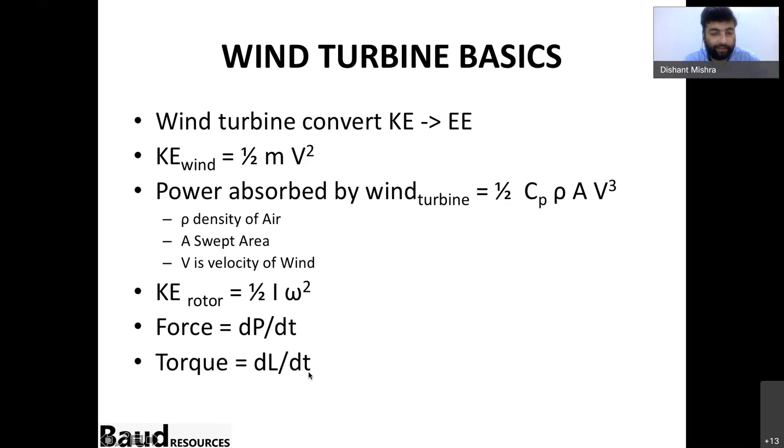For understanding the technology, we also need to know that kinetic energy of a rotating device is equal to half I omega square. Force can be written as the rate of change of momentum, dp by dt, and torque is dl by dt, where L is angular momentum.

In a regular wind turbine, there is aerodynamic loading onto the turbine as I represented in the previous slide, and all the energy given to the turbine is converted to half I omega square into omega - that's power. The electrical system takes away the power by having a rate of change of flux, d phi by dt. The purpose here isn't to take you through the mathematics, but to understand the transaction between all the components.

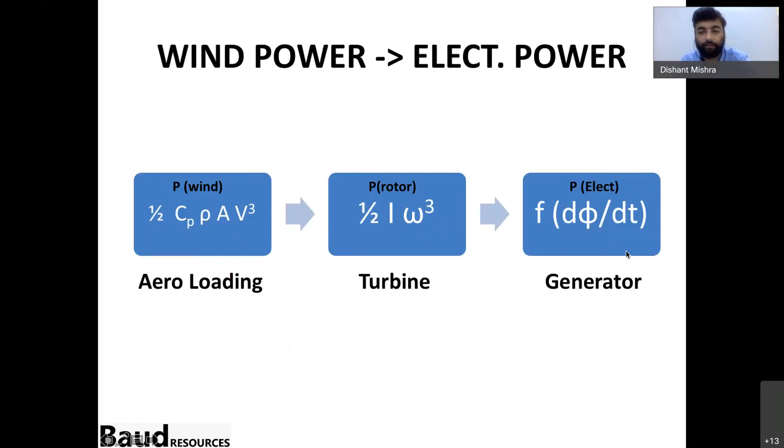Wind comes in and is absorbed into the turbine in mechanical form. From mechanical form, it reaches the electrical system. So these are the three transactions: air to mechanical, mechanical to electrical.

If you go through a typical graph between power and wind velocity, you'll find the turbine starts to generate at a cut-in velocity, where the input energy is sufficient to energize the generator. Once online, it reaches a height when the graph peaks, known as the rated power. It's a function of velocity, and once it reaches the rated velocity of the turbine, the additional power given to the system is actually being rejected.

So we've divided the entire graph into two parts: the sub-rated, where you haven't reached the rated point, and rated, which is the specific line where power is at its peak. Beyond that, whatever input the velocity is giving is actually being rejected. That is the super-rated zone.

I want to take a step back and tell you that wind turbine is the only power generation based out of turbine where the fuel supply is not in control. If ideally we had wind in our control, we would have created it in such a way that it exactly matched the demand we have. But wind is not in our control, and that's why we have to keep the controls in such a way that we generate the maximum, but beyond a point it's not possible for us to generate that.

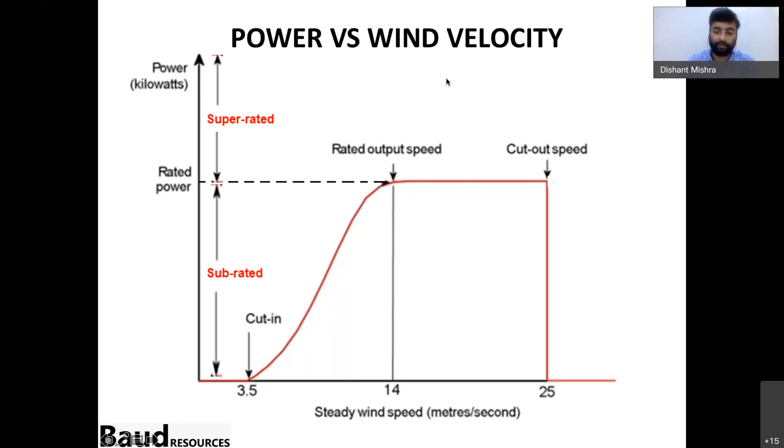If you extrapolate the graph, you'll find a huge amount of wind—if you add 14 to 15 over here, the graph reaches a very high place on the power side. That's any velocity you add beyond rated. So whatever we are rejecting is a huge volume, and that's where we see a lot of wind across the year.

If we do the numbers, a 1 megawatt turbine will have around 30,000 megawatt hours crossing it, but at the end of the year it generates only 2,500—roughly 10% of its total capacity. So current wind turbines generate only around 10%. The number may vary, but it won't go much beyond 20% from what I see. So only around 10% of the wind energy that goes through the turbine becomes electricity.

The reason is, whenever there is high wind, we just have to reject it simply because our turbine system cannot capture it. And this is what started as the opening thought for us to do the research.

I've been in wind turbine technology for around 8 years, and the initial 4 years were my research and development time, during my period in university in Germany.

I was able to go through and understand what can be done about this, and we identified that any flywheel or power generating rotating device has a kinetic energy which is half I omega squared. The only two ways to increase its kinetic energy are to increase omega or to increase I. In current wind turbines, omega is actually locked beyond a point—you cannot go, let's say, beyond 300 rpm.

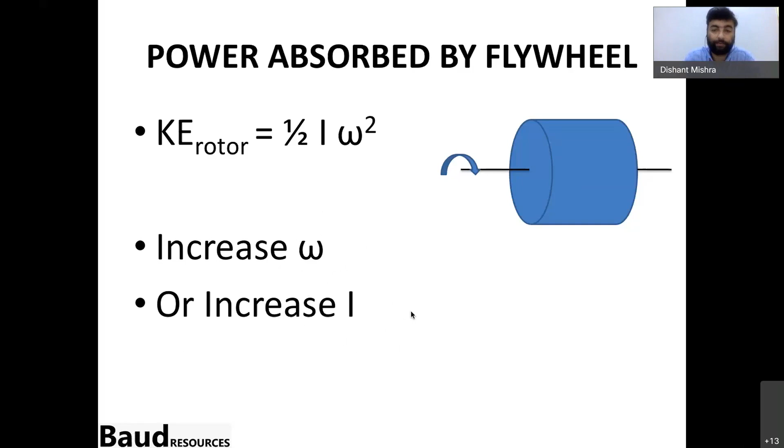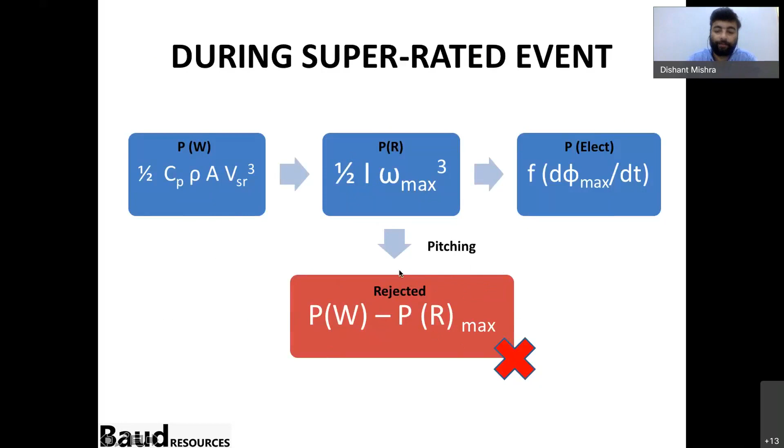That's where only half part of the mathematics has been restricted. The other half is actually I, and that's where we can still go out and increase that. That's where the problem lies—converting aero load to mechanical load—and this is where current wind turbines cannot handle it, simply because they have a limitation on omega. Because of that, all turbines are designed to reject the additional omega. But in our tech, what we're proposing is: do not increase omega, just increase the I, and that's where we come in. I don't want to go through the details, but this is what we do.

This is how the turbine has been designed. In the sub-rated zone, there are weights placed inside the turbine, and when it's in the sub-rated zone, we are not shifting any weight anywhere. The omega is running the show, and I is at minimal.

As soon as we hit the omega, which is the rated omega, beyond which we just start to take out, instead of pushing the turbine in omega terms, we are pushing the turbine in terms of I, that is the moment of inertia. And that is how we are actually able to store a lot of energy for the moment of time that the inertia is high.

As soon as there is wind falling down, wind is always going up and down. So as soon as the wind is falling down, we will have opportunity to bring down the weights back into their position slowly, in intermediate positions also, to specifically make I in such a way that additional energy available for us to dispatch, we can dispatch by bringing the weights back. So this is how the whole control system is based. This is what the actual action is required at the turbine level, and this is what we are doing.

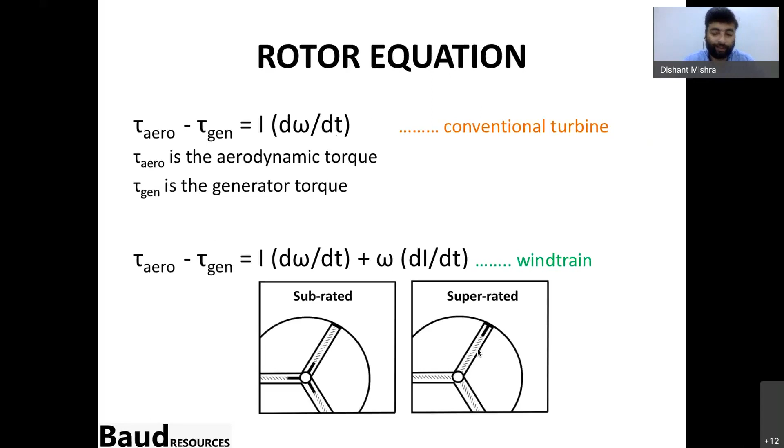And it just deals with a lot of basic physics, Newtonian physics, and this equates to the rocket equation. In case of a rocket, there is a change in the mass of the rocket, and in most other cases there is no change in the mass.

Whenever a body is traveling, you will find the masses are constant, or if they are not constant, in case of, let's say, a car is moving. And definitely when you are burning fuel over a lengthy journey, you will find the weight of the car has reduced, but it has reduced at a very small rate. The rate of change of mass is very minuscule. But in other cases, you will not find this change.

But only in case of rockets this is very evident, because the rate at which the mass is being thrown out of the system, the boundary of the rocket, imaginary boundary, the amount of mass being rejected out of the system is huge. So that's why calculations of rocketry require all these changes.

So if you go through the second law of motion, the rate of change of momentum dictates the force, or the force dictates the rate of change of momentum. Whenever we are changing the momentum, there is a force. In the conventional equation, we don't account for this part, which is the rate of change of mass. Likewise, I told you for different examples.

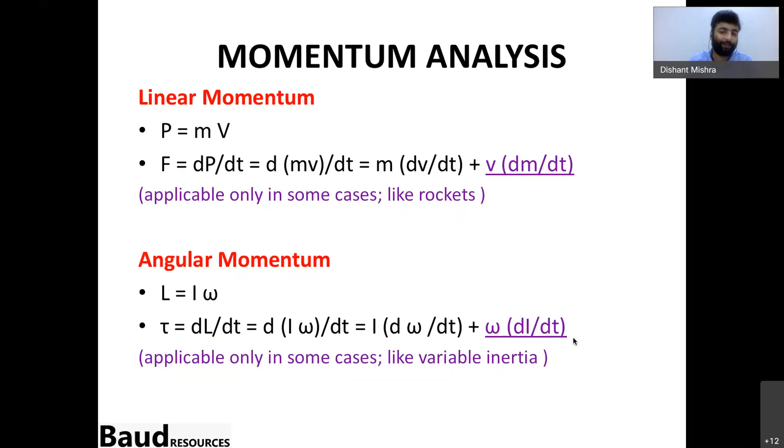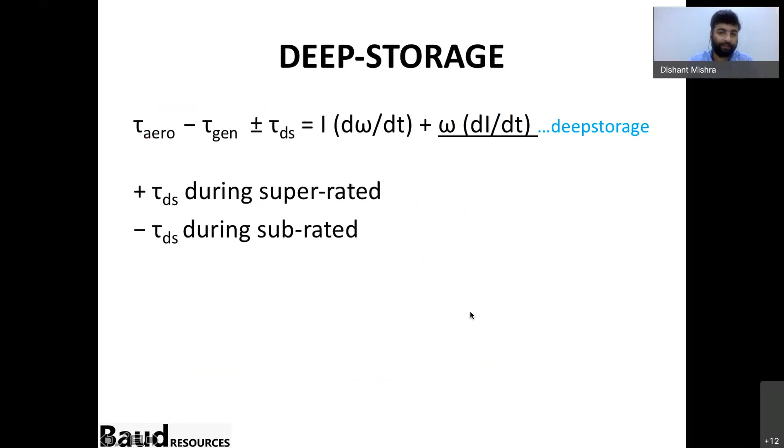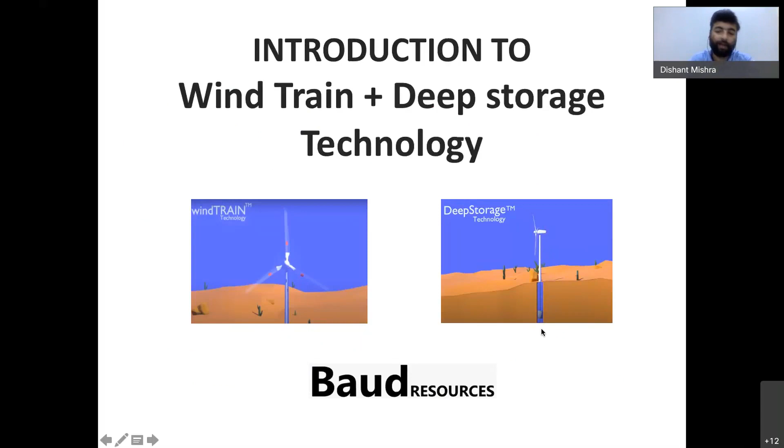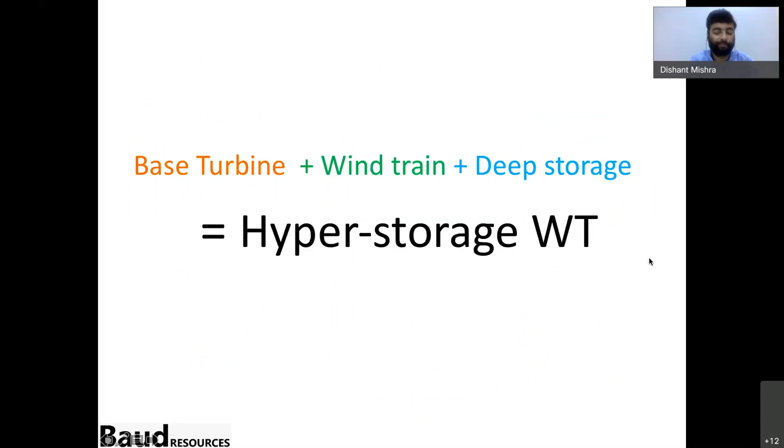So a base turbine plus wind train technology plus deep storage would be able to do something called a hyper storage wind turbine, and the application for it would be, it's a beautiful piece of storage. I mean, if you see, it can interact.

The current wind turbines have a very simple arrow diagram. If you want to know it that way, the wind is coming, there is a turbine, and the electricity is going into the grid. But a hyper storage turbine has very different connections with the grid. So it has an intermediate storage, which you've already seen, the storage available in the turbine blades, and the storage available below the base of the foundation of the turbine, that is deep storage.

And in that case, a turbine can be programmed for 15-20 minutes, or 1 hour to 2 hours of storage. And whenever there are fluctuations on the wind side or on the grid side, it can store energy or dispatch extra energy from its storage and reach the grid. So this is like the broad summary of both the technologies put together. They are known as hyper storage wind turbine.

So that would be my presentation. If you people have any questions from your side, I'll be happy to answer that.

Because of confidentiality agreements, I wasn't able to show you all the details. But if anyone is interested, we publish programs for internship as well as for early researchers who want to publish papers. If you've done prior work in energy storage, renewable energy, wind turbines, or solar energy, we take applications for internship and research programs. If you're pursuing a PhD or masters, we can sign an NDA and bring you on to take this up.

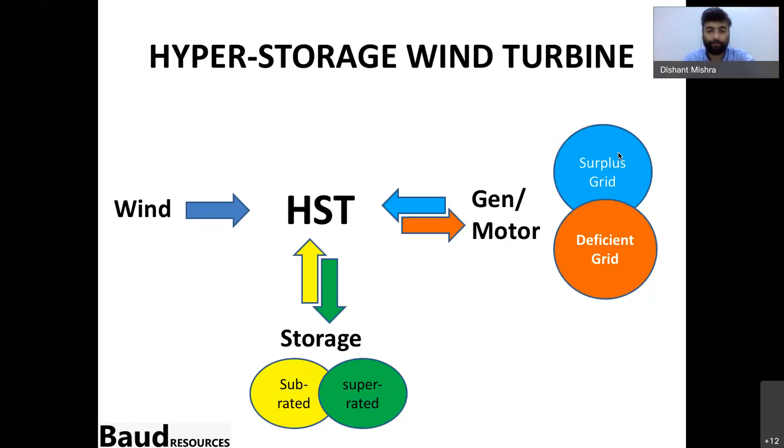We have a lot of opportunity to publish papers at the company, but we're not able to do that job simply because our focus is to develop the product, not the additional research that goes along with it. So we're more than happy to pass it on to academia or to agencies that can help us take it up. Any questions? I will now invite Preethy back.

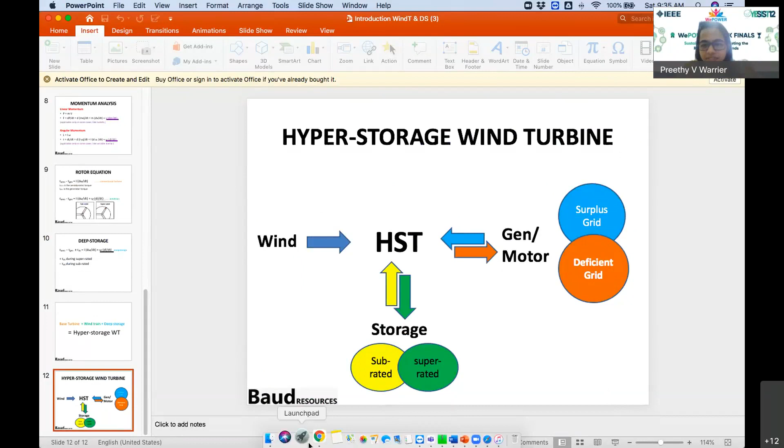Thank you so much, Dishant. That was a really wonderful presentation and a variety of technology we have not seen before. Hats off for bringing this up, and thank you for giving us this information. It will motivate those listening to think out of the box and bring new solutions that can solve problems existing in the community.